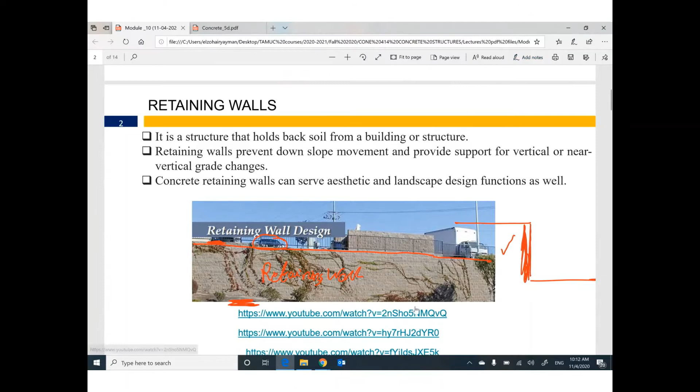I will start with this video. This is a collapse in a retaining wall. Guys, we have a retaining wall supporting the soil behind. For what? This retaining wall, or this retaining structure, helps us to excavate this site for foundation work.

We are constructing a new building, so we did a very deep excavation. So we have a difference between this level of soil and this level of soil. So we constructed this retaining structure to support the soil behind. For some reason, we have a collapse. Can you watch?

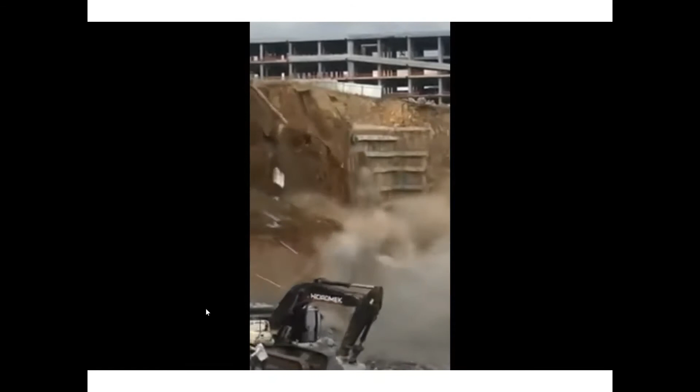It looks like what? Guys, it looks like what? Yeah, I know it's a collapse. What is the reason for this collapse?

I mean, if you have a retaining wall and you have soil supported by this retaining wall, I expect lateral force.

I will go back to the video and see what happened at the collapse moment exactly. Can you watch it again? One more time, please pay attention. What happened exactly? Horizontal movement.

Can you watch? So I expect... no, not enough reinforcement, because this is not a concrete structure, it's wood.

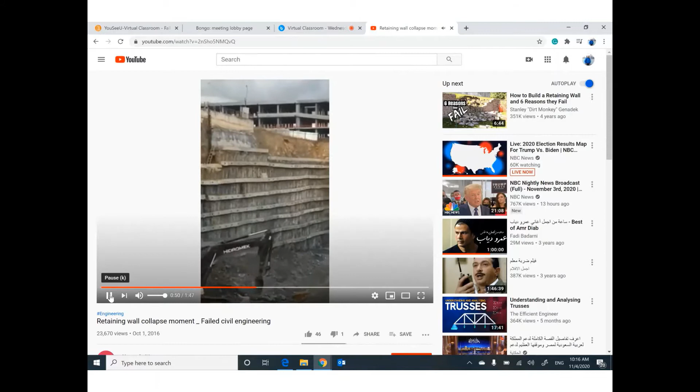We have a pressure, yes, we have lateral pressure from the soil. This structure is not a concrete structure, it's a wood structure. The problem is not with the reinforcement, the problem is something different. We have pushing from the soil.

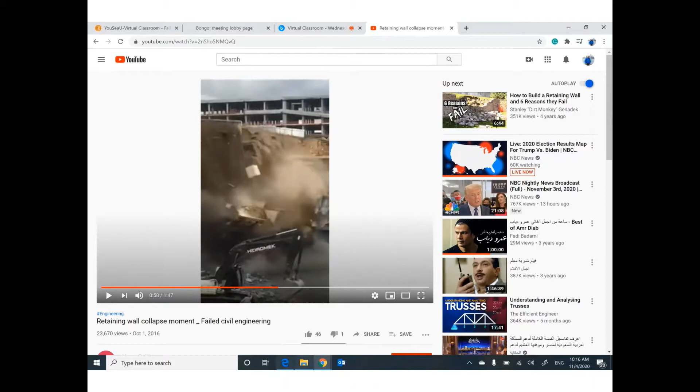So if you have a retaining wall, the load on this wall will come from this soil. The soil will push this wall horizontally. Let's see another video.

This one is reinforced concrete. We have a huge height of soil.

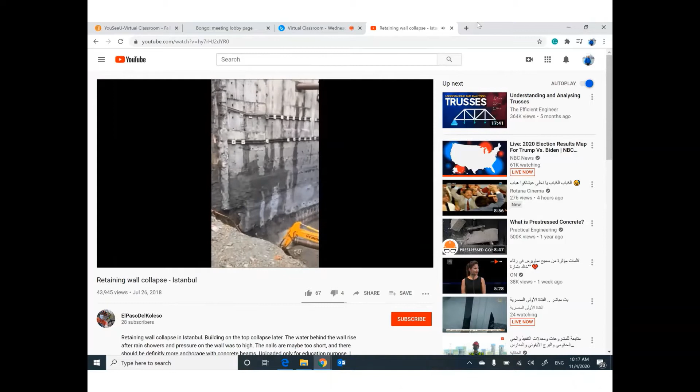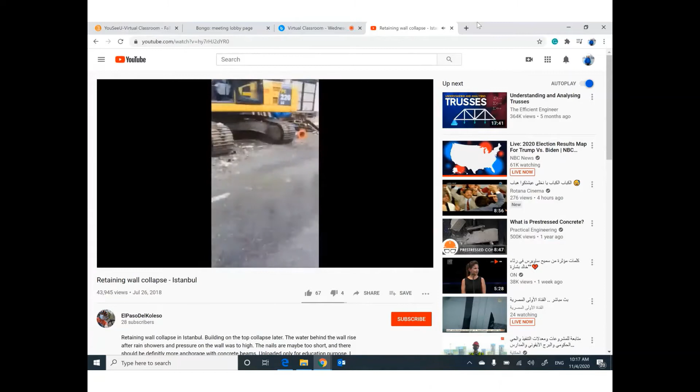Hey guys, can you watch the building above? Can you watch the building here? It's a disaster. It's a big problem because collapse of a retaining wall will cause collapse in the soil. And this soil is probably supporting another building. So it's not good to expect this kind of failure.

Also, if you go back to the video, we expect lateral movement. All of these steel beams are trying to support this wall laterally. So we have a big issue with the lateral movement of the retaining wall, and this lateral movement comes from the lateral pressure from the soil.

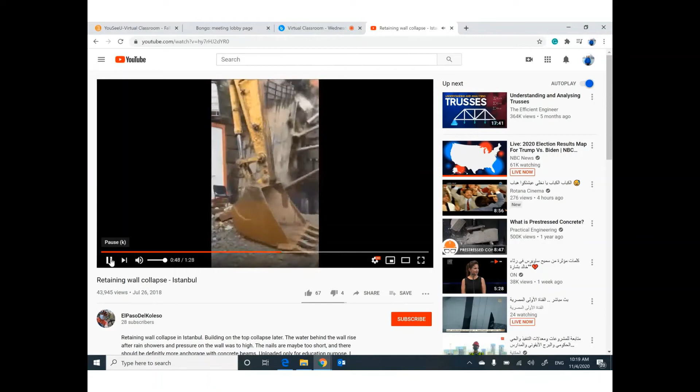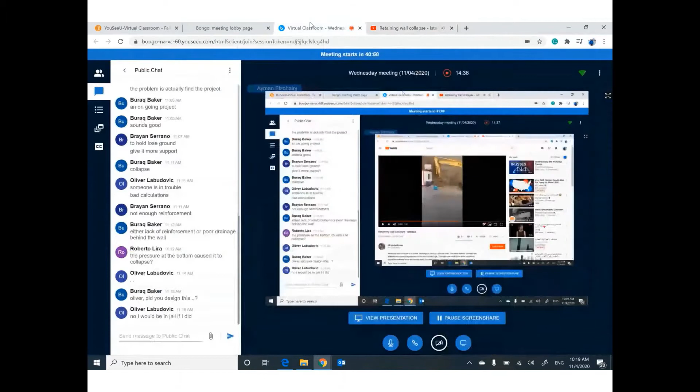One more time. Yes, I believe Oliver, yes. Can you...

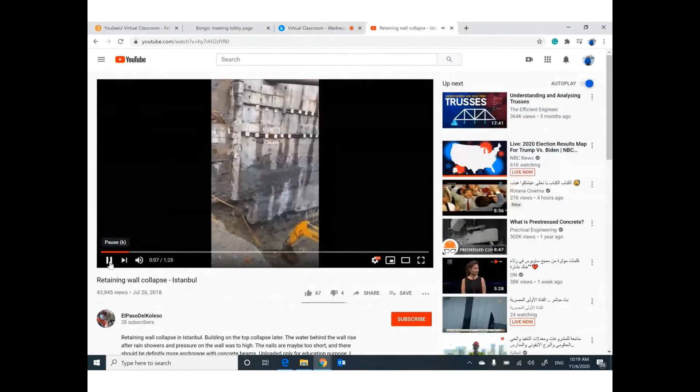Hey guys, can you watch this person? I believe he is an engineer. He is responsible for this collapse. So he is putting his hand on his head because he is expecting what will happen to him.

Okay, so be careful. As a designer, you are responsible for any collapse. So I hope nobody ends up in this situation. It's a bad situation. Anyway, let's see one more.

I think the third one is a collapse also.

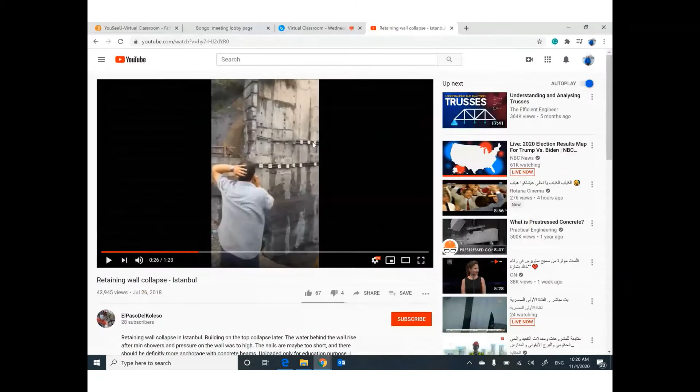This is an example of a retaining wall failure. Can you expect what will happen? Here is the retaining wall, it's an experiment, and here is the soil. This retaining wall is supporting this soil, and this soil is trying to push this retaining wall.

A familiar hazard in ground engineering. Any horizontal movement for any reason, sliding, overturning, anything related to these two movements, sliding or overturning for the retaining wall, failure will happen for the soil.

Designed a wall to hold the dry, sandy soil whilst houses have been built above. Examples of this can be seen where roads or railways or other excavations have been built that cut into the land.

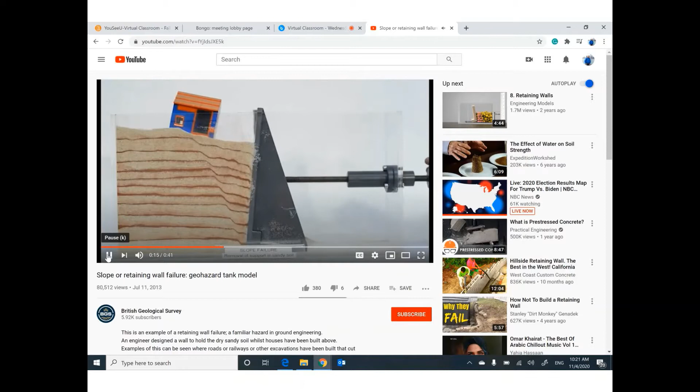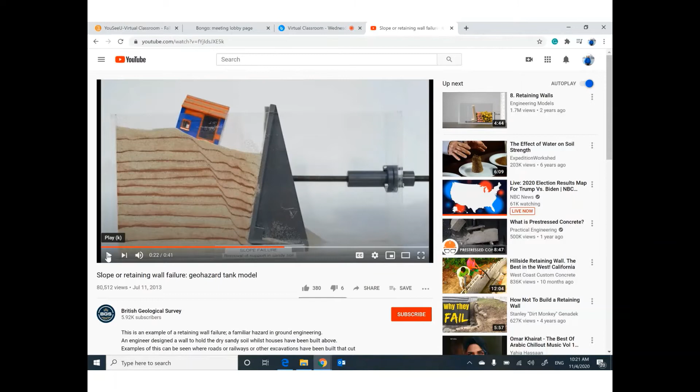Unfortunately, this wall has not been designed correctly and has started to fail. I think this failure is overturning the retaining wall, trying to overturn around this edge. This will cause collapse for the soil and collapse for anything on this soil.

This slope failure is translational in nature, and you can see the slip planes that have formed. Slope failures in wet clays and silts tend to fail at shallow angles and be of a rotational or flow type failure.

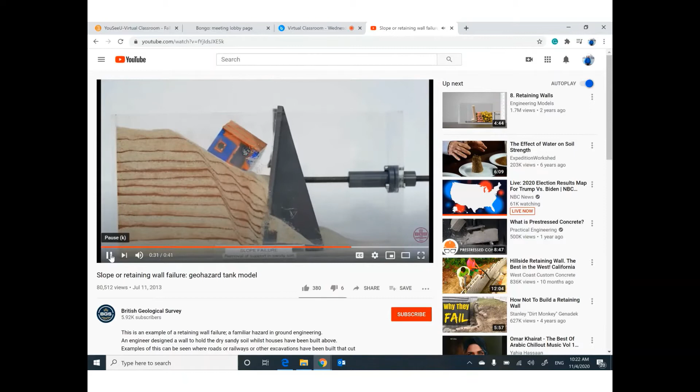So you have to calculate the lateral pressure from the soil correctly, and you have to check the stability of the retaining wall against sliding and against overturning. Okay? That makes sense?

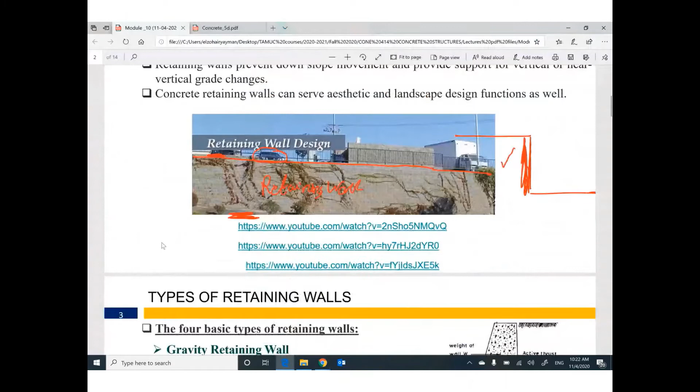This topic is related mainly to soil mechanics, but I will cover it a little bit in our course because it's talking about soil and properties of soil. Anyway, we have different types of retaining wall.

Sometimes the retaining wall can be called a gravity retaining wall. We have a massive structure like this one. Massive means a huge amount of concrete, because the huge amount of concrete will have a huge weight. This weight will cause support, will support this retaining wall against the lateral pressure from the soil. So we don't need any reinforcement, just plain concrete without reinforcement, but a huge amount, large dimensions of concrete, to make support to the soil.

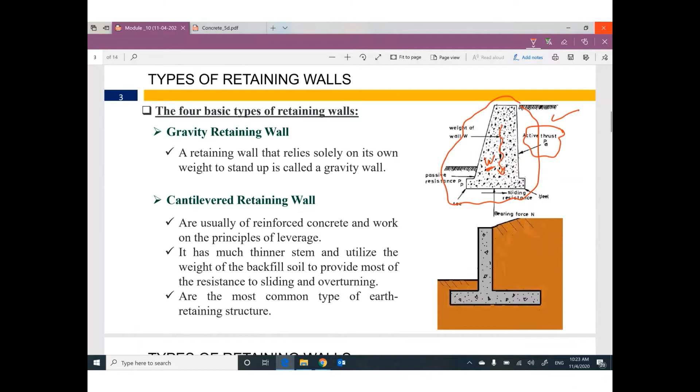But before we continue, guys, I need to make sure you understand what's going on. We have a level of soil, and we have another level of soil. We need to construct something in between to support this high level from collapse due to the difference in the levels.

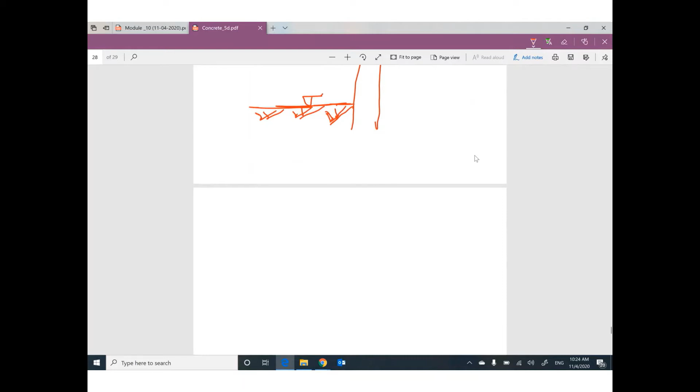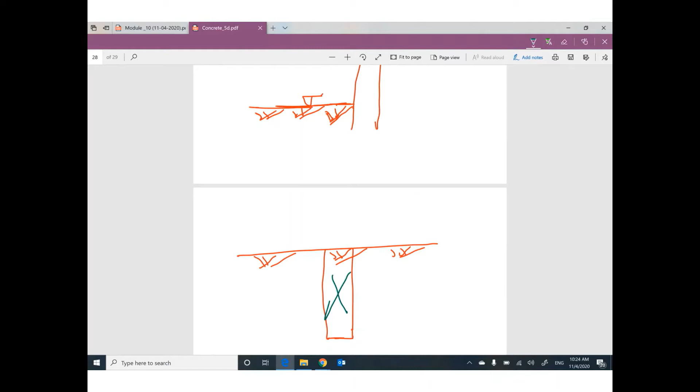Because one of you will say, hey, we have a soil level like this, ground surface, and I will construct a retaining wall like this. Are you kidding me? What is the main purpose for this one? Nothing. To construct a retaining wall, we must have a difference between two levels.

And that makes sense, okay. The second type of retaining wall is called cantilever retaining wall, it's reinforced concrete. This one is reinforced concrete. We have concrete and reinforcement supporting this soil behind this retaining wall.

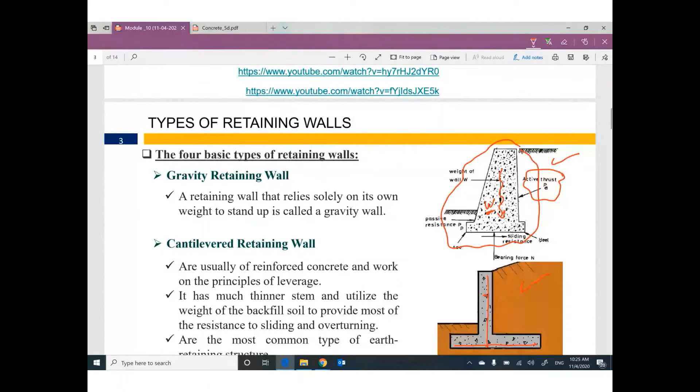So the first type is called gravity retaining wall, just a massive mass of concrete. The second one, cantilever retaining wall, we are using small dimensions of concrete, but with reinforcement.

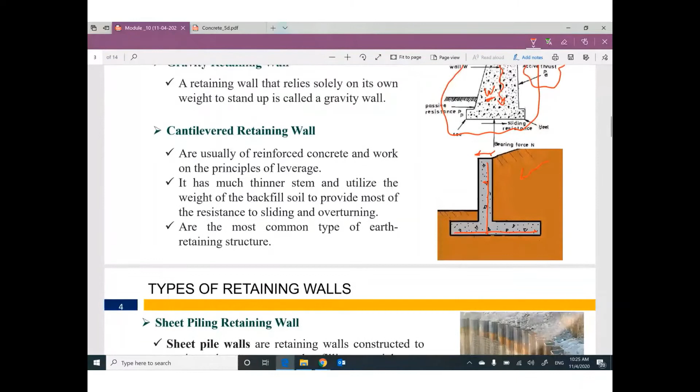The third type is called sheet pile. We have steel shapes like this, and this shape has a specific or special form, so we can construct this one and drive it into the ground.

Let's watch this video and see how the retaining wall is constructed. Interesting.

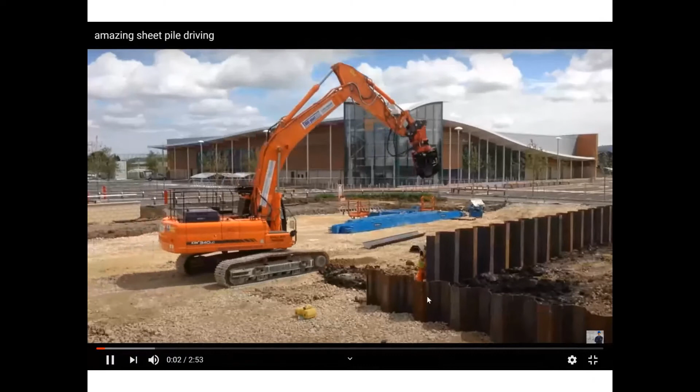So guys, the sheet pile is a steel sheet, as you see on the ground, this one. So we have a technique by raising this sheet pile and putting it in position and trying to drive it into the soil.

Make sure you are paying attention because I should ask you a question right now.

So guys, to make sure you are constructing this sheet pile correctly, at the edge of each sheet we have a connection. One of them is male and the other one is female. So he is trying to adjust the connection before sliding this one down.

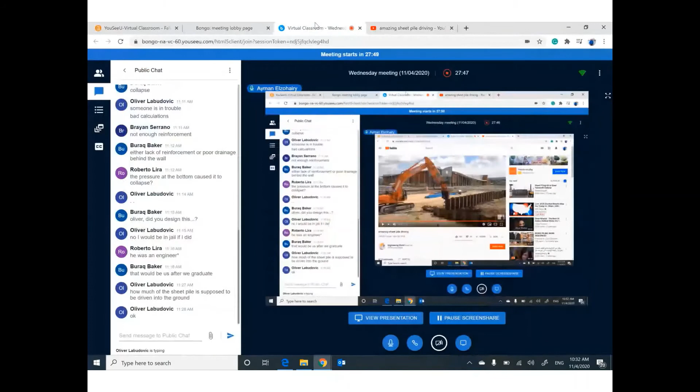That's right. They are planning to excavate one side. Before starting to excavate, the ground surface is the same. And then they drive these sheet piles into the ground like this.

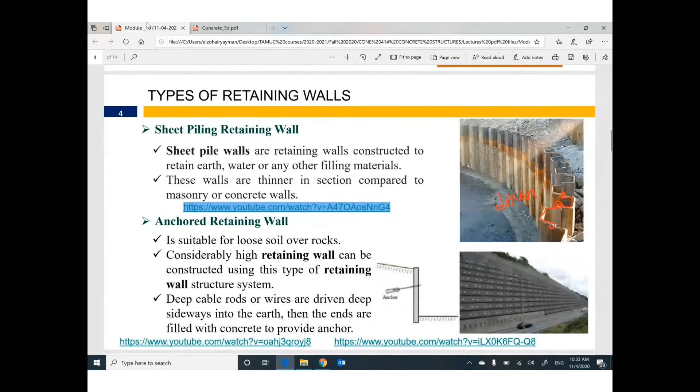Once they are done, they will start to excavate the site. I cannot start to excavate first before constructing these sheet piles. Does that make sense?

So for the case of sheet piles, we are constructing them first, and the ground surface is the same. Once we are done around the area of the land, then we will start to excavate the site for a certain depth. Then this retaining wall or these sheet piles are there.

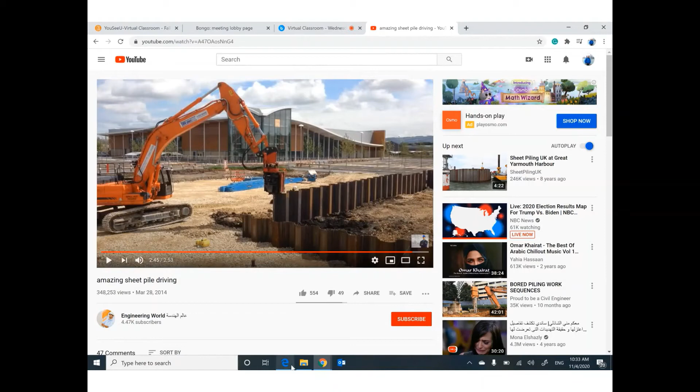So the final shape will be like this. The final ground surface after excavation is at this level, and the original ground surface is at this level. This retaining wall or these sheet piles support this soil from collapse.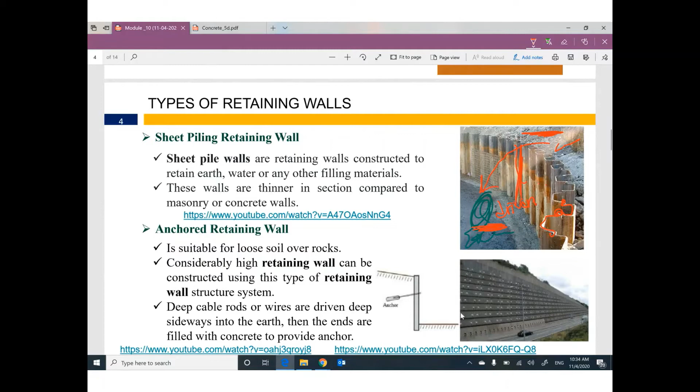Okay. Sometimes, guys, I think that makes sense for you. If you have this level of soil and this level of soil, I think the retaining wall or the sheet pile must be driven to another depth here, and that makes sense. Why?

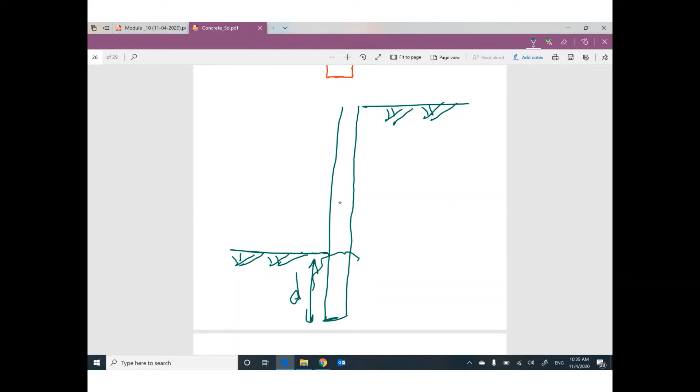Because this depth will make fixation for the sheet pile or the retaining wall from overturning. Does that make sense?

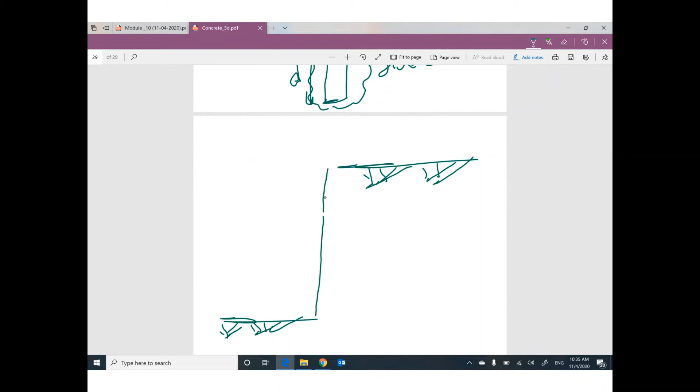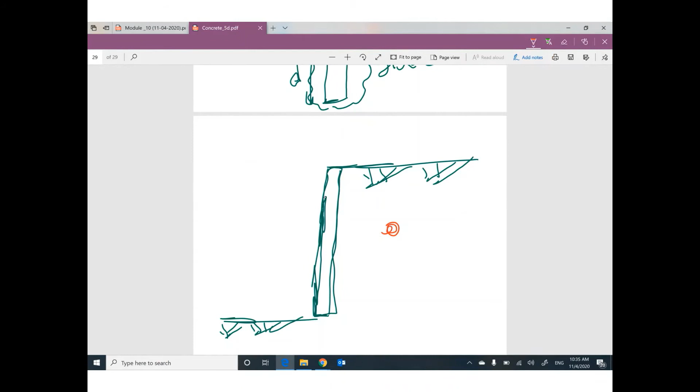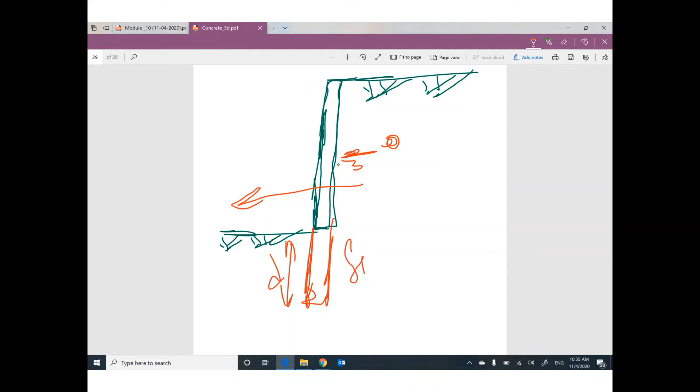It doesn't make any sense to have this ground level and this ground level and construct the retaining wall like this. I believe this soil will push this retaining wall and move it. We should have a driven depth here to make fixation for the sheet pile. Do you agree?

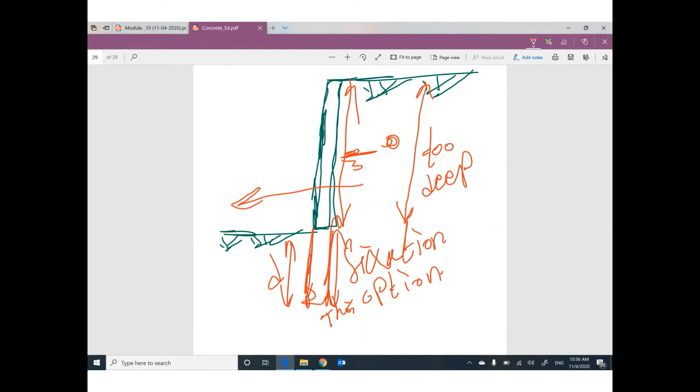Sometimes we don't have this option. Why? Because this depth is too long, too deep. If you add to this length another depth for fixation, you'd expect 100 feet or 80 feet, very, very deep. We have another option, which is called an anchored retaining wall.

What do you mean by anchored? Okay, I can give you another option. Here is a retaining wall. Here is the soil supported. Here is the other side of soil. I will put an anchor here.

This anchor is supported by this soil and supports this wall. I will put another anchor, and another anchor. This is called an anchored retaining wall.

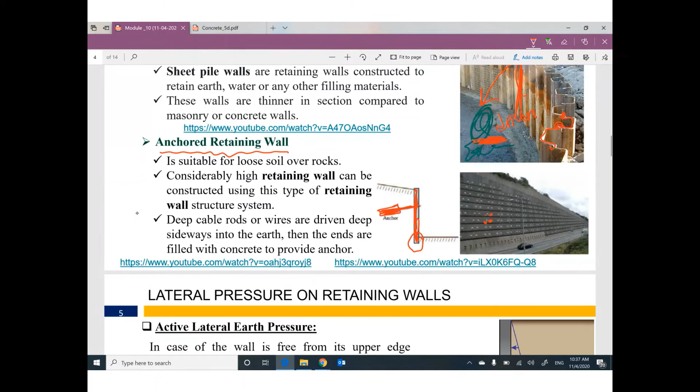Here is the retaining wall. I don't have enough depth here, so I will anchor this retaining wall with this one. How can I construct this one? Can you watch this retaining wall? At this location, we have anchors. These anchors extend into the soil behind this retaining wall. Let's try to watch this video.

This topic is very interesting. Can you see? We have a technique. After you construct the retaining wall, I will construct the anchor using this machine. This material is called grout, something that looks like cement with water. I am done.

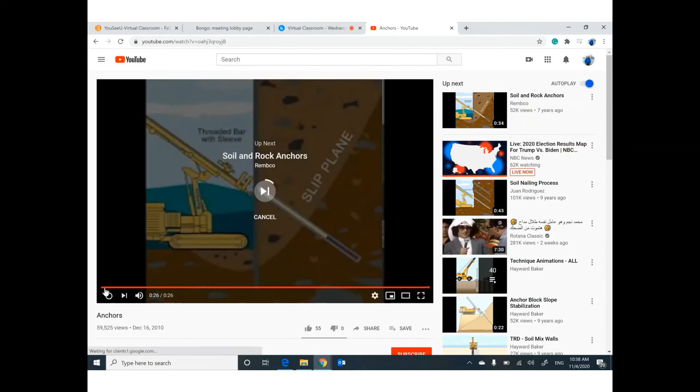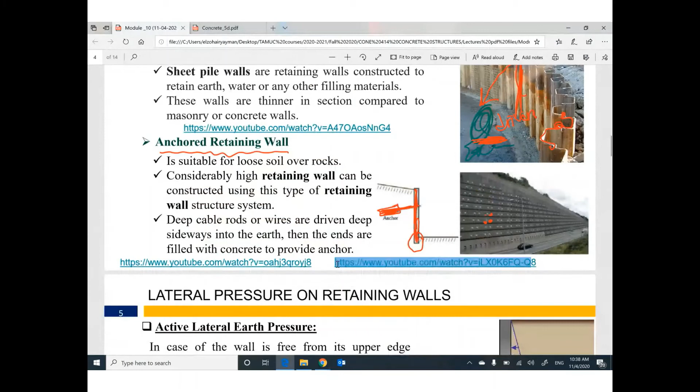I have another one. We have vertical piles, concrete piles, and we already made this hole inside the soil. And we have a cable, and this cable will be pre-stressed. So this one is a pre-stressed anchor.

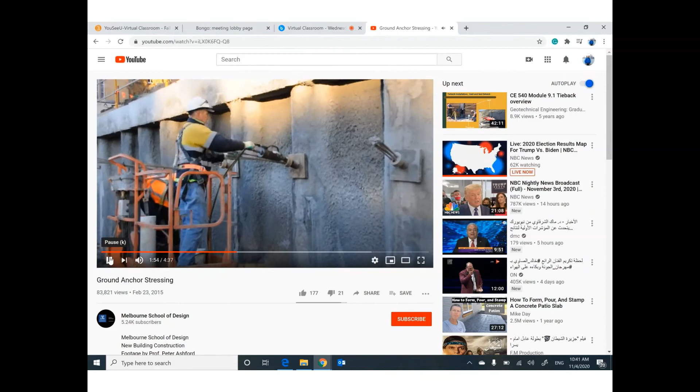This one is called a hydraulic jack. It's trying to pull these cables out to make pre-stressed anchors. I will talk about this next week in more detail.

This one is called pre-stressed anchors, but this anchor supports this retaining wall inside the soil behind. So we have a system: the retaining wall supports the soil, and at the same time the soil supports this anchor which supports the retaining wall.

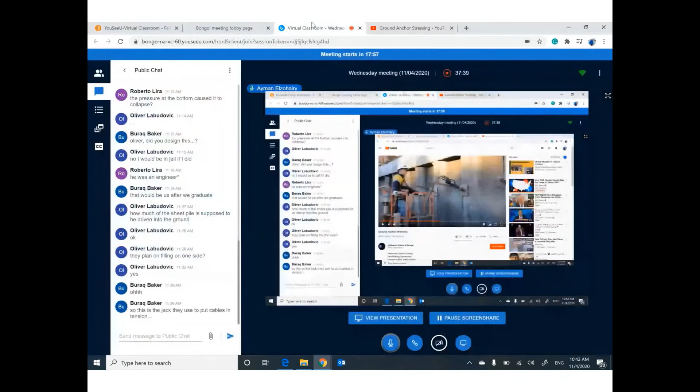Cable in pre-stressed, it's a dangerous hydraulic jack because if something wrong happens, we can expect a deadly accident. So watch - when this jack tries to pull these cables out, this person should be far away a little bit from these anchors, from this hydraulic jack. It's very dangerous.

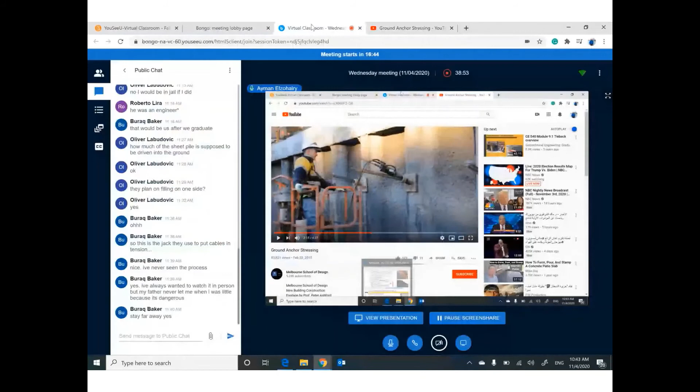Yeah, it's very dangerous. I visited a company for pre-stress before in Missouri. When they are pulling these cables, everybody should be sheltered during this process. They cannot start this process if anybody is around the area. I believe we have these companies here in Texas, but there's no way to visit them at this time because of COVID-19. Anyway, let's go back.

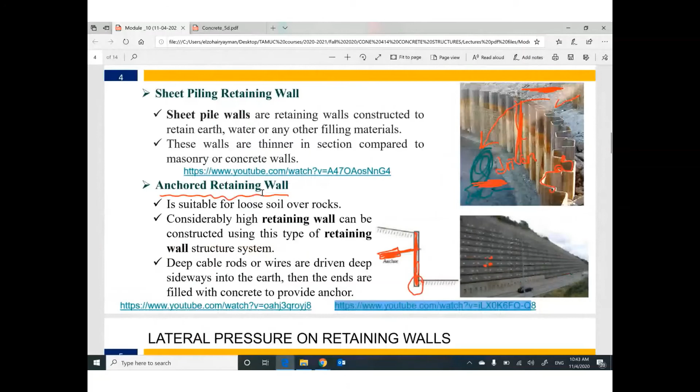So we have different types of retaining walls: gravity retaining wall, cantilevered retaining wall, sheet pile, anchored retaining wall, and these anchors are probably sometimes pre-stressed.

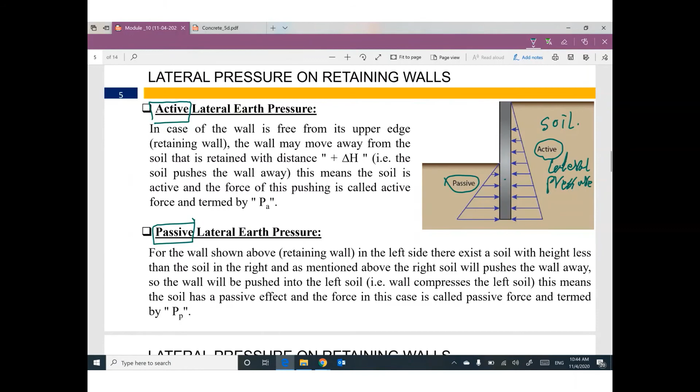Okay, so we agreed that the effect of the soil on the retaining wall is lateral pressure. This lateral pressure can be divided between active and passive. One side will be active lateral pressure, the other side will be passive lateral pressure. You have to decide which side is active and which side is passive - it's very easy.

What do you expect for this retaining wall? What movement do you expect? Do you think this retaining wall will move to the right or to the left under the effect of this soil and this soil? What is your expectation? I need an answer.

Guys, one more time. We have soil at this level, we have another soil at this level, and we have a retaining wall in between. Which soil will push this retaining wall? Do you think this soil will push the retaining wall to the left, or this soil will push it to the right? What is your expectation?

I think that makes sense - this soil has a higher level than this level, so I expect this soil will try to push this retaining wall away. So this soil can be called, or can cause, active lateral pressure, and the retaining wall coming into this soil, so this one can be called the passive side.

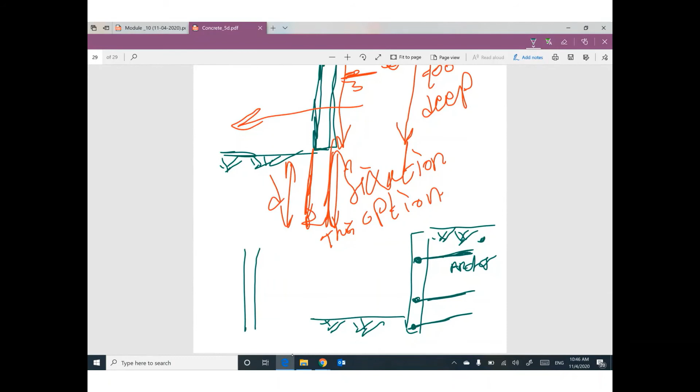So before starting to solve any retaining wall problem, you have to decide which side of the soil is active and which one is passive. Which one is active? The one with the higher ground surface. Which one is passive? The one with the lower ground surface.

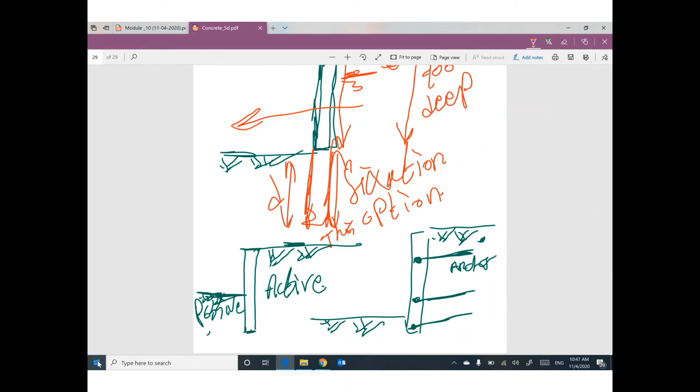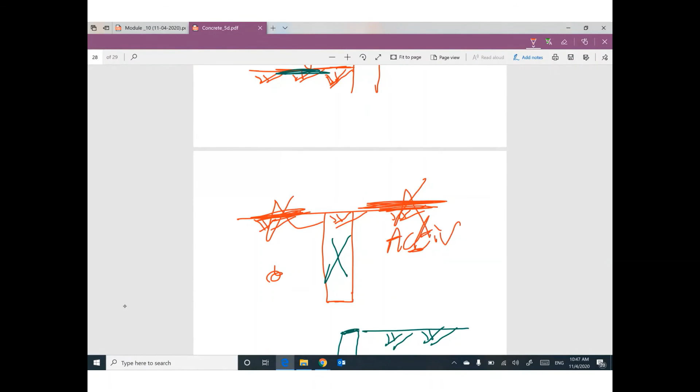We discussed this before - we should have a difference between this level and this level, because one of you will ask me, hey, if both of them are at the same level, it doesn't make any sense. No way, we should have a difference in levels. So the higher level will be active, and the lower level will be passive. It's very important to understand this point.

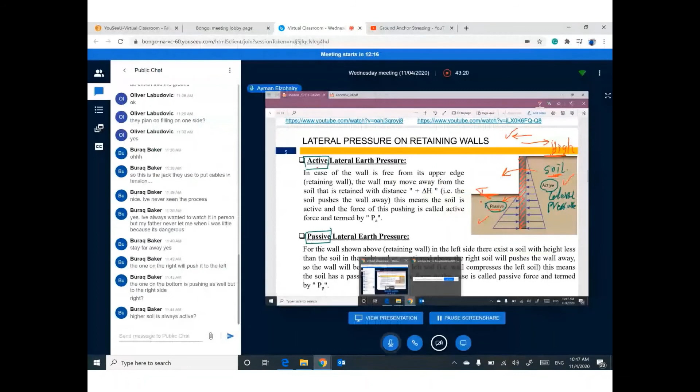So guys, lateral earth pressure can be divided between active and passive earth pressure. Any questions so far?

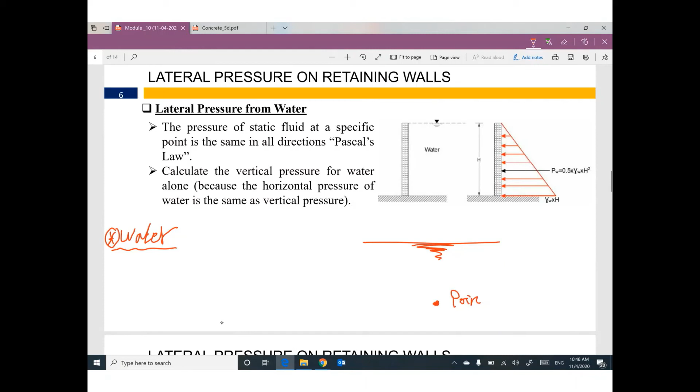I will start first if we are talking about water - we discussed this phenomena in hydraulics. If you have a water surface and you are talking about this point, pressure at any point in water equals gamma H, where gamma is for water, and H is the height of water above this point. Do you remember that? This pressure is the same value horizontally, vertically, or in any direction.

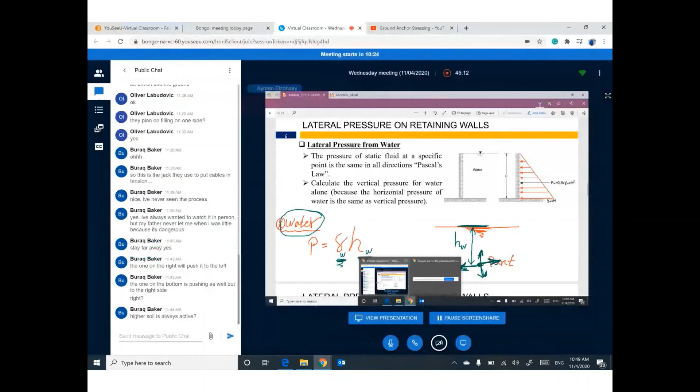So the pressure in this direction is the same as the pressure in this direction, the same as this direction, the same as this direction, because you are talking about water. So pressure from water equals gamma H - gamma for water, H for the distance between the point and the water surface. This is the case if you are talking about water.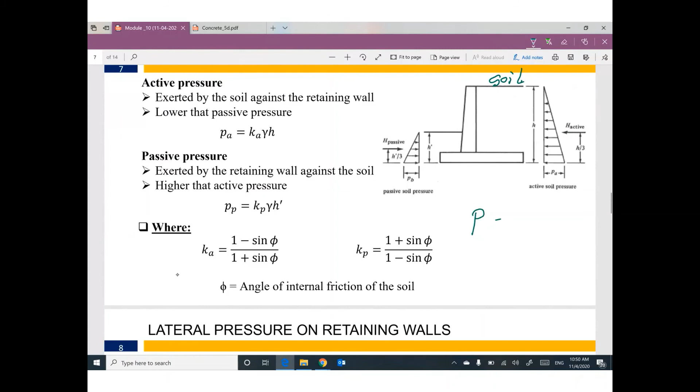But if we have soil, the same sequence applies: pressure for the soil equals gamma H, but at this moment, gamma is for soil and H is for soil.

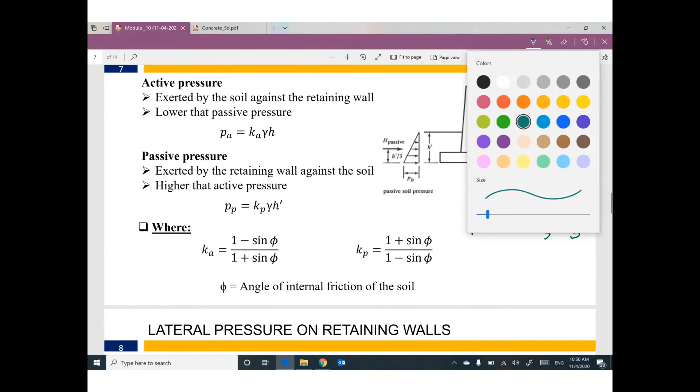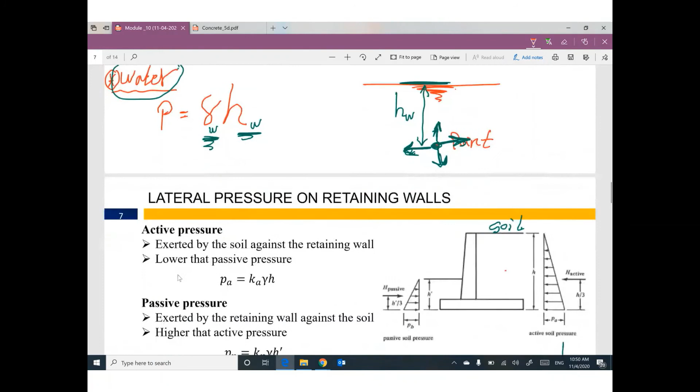I think the lateral pressure from soil doesn't look like the lateral pressure from water. There's a big difference. So we have another factor here called K. This K, probably K active, probably K passive. How can I know this?

That's a good question. If you are talking about this side of soil, this side will be active. Why? We have a higher level of soil. That means this pressure will be K active gamma H. H is the distance between this point and the soil surface. But at this point, we don't have H, K active gamma H, so the pressure is 0. We have a value here, so we have a triangle.

That makes sense. On the other side, we have a lower level of soil, so we have passive. So the pressure at this location will be K passive gamma H. Gamma soil, H soil. At this point, we don't have H, K active, K passive, gamma H. We don't have H, so the value is 0. So we will have a triangle.

So the only difference between this side and this side is this factor. This factor will be active or sometimes will be passive. How can I figure out the value of this factor? K active equals 1 minus sine phi divided by 1 plus sine phi, according to soil mechanics. K passive will be 1 plus sine phi divided by 1 minus sine phi, or equal to 1 divided by K active.

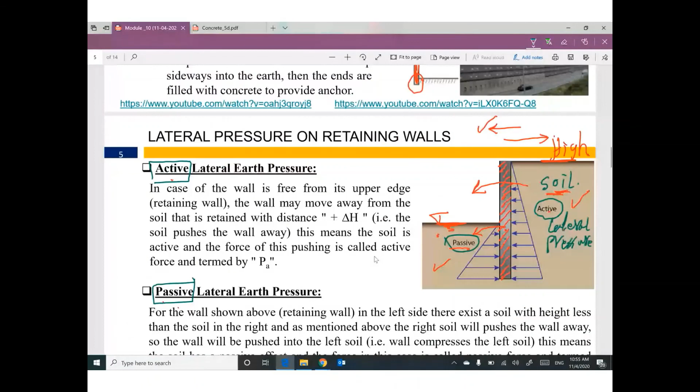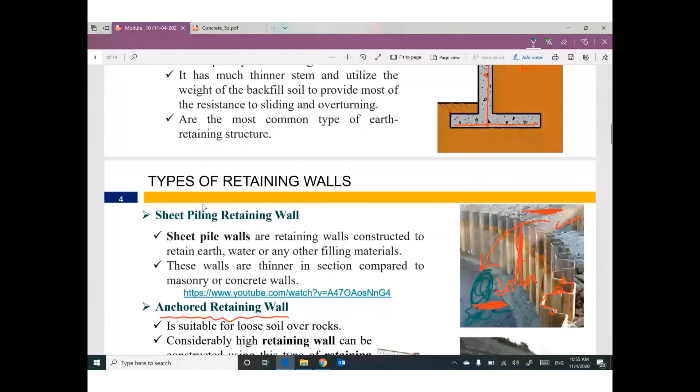Any question? So I covered today just a few points: what is the meaning of retaining wall, what are the main types of retaining wall, what is the type of lateral soil pressure. Sometimes we have active, sometimes we have passive. Which side is active, which side is passive? I can figure it out.

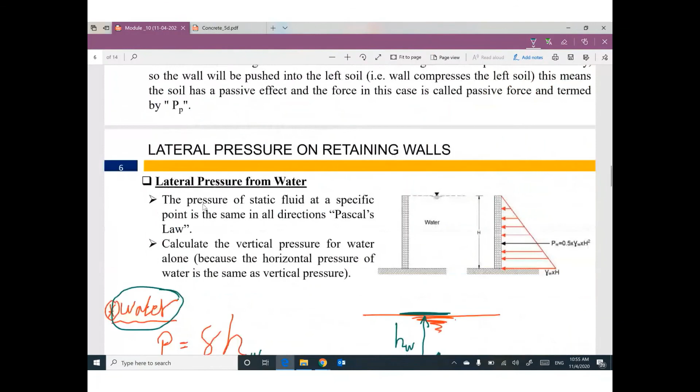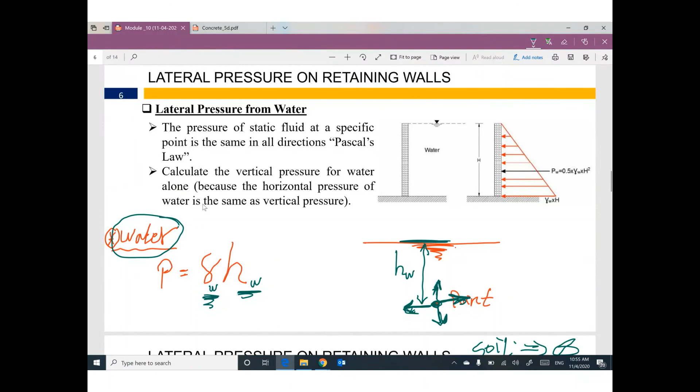For water, or for any liquid, pressure equals gamma H without anything else. But when you're talking about soil, pressure equals gamma H times a factor K. This factor can be active or passive, based on which side you're talking about. If active side, K active equals 1 minus sine phi divided by 1 plus sine phi. If passive side, K passive equals 1 plus sine phi divided by 1 minus sine phi, or equal to 1 divided by K active, where phi is called the angle of internal friction.